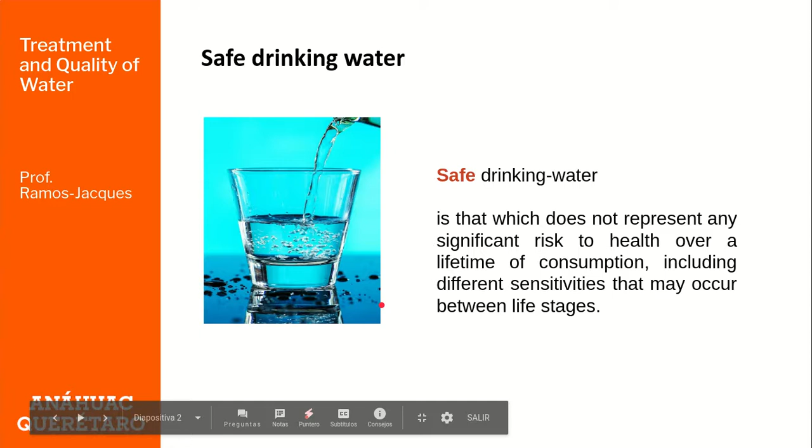How could we determine that water is safe to drink? We must know the quality of water. Water quality is measured by specific characteristics: physical, chemical, microbiological, and radiological.

Drinking water must be free from taste, odor, and color. This is a physical perception and it is subjective, but we won't drink water that doesn't have these characteristics. The real safe drinking water comes from three characteristics: chemical, microbiological, and radiological.

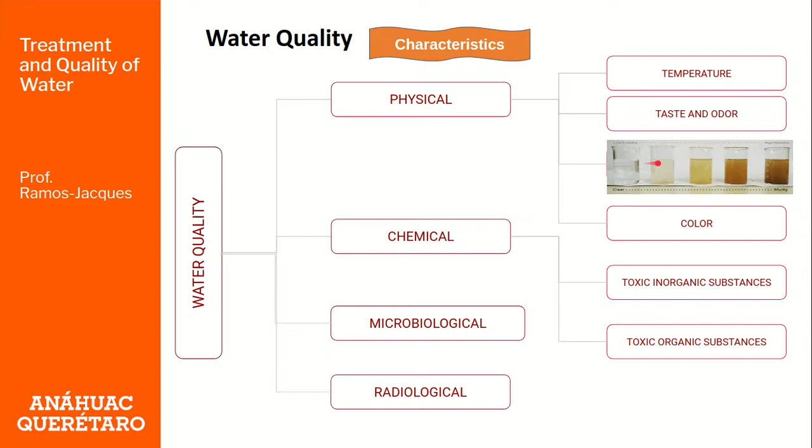For example, physical characteristics could be the turbidity and color of water. Turbidity is also known as opacity and visually indicates the quantity of suspended solids. You can see here clear to murky samples of water. Which of these samples would you drink?

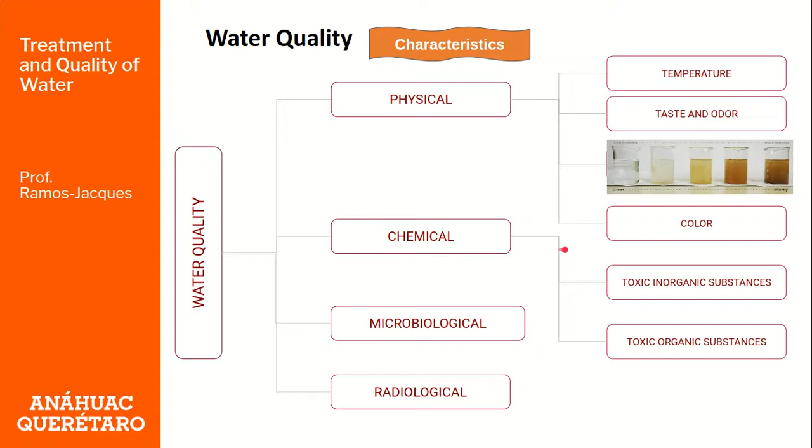In wastewater, color indicates wastewater age, like gray or black in anaerobic conditions. You can see here this black water, wastewater, is contaminated.

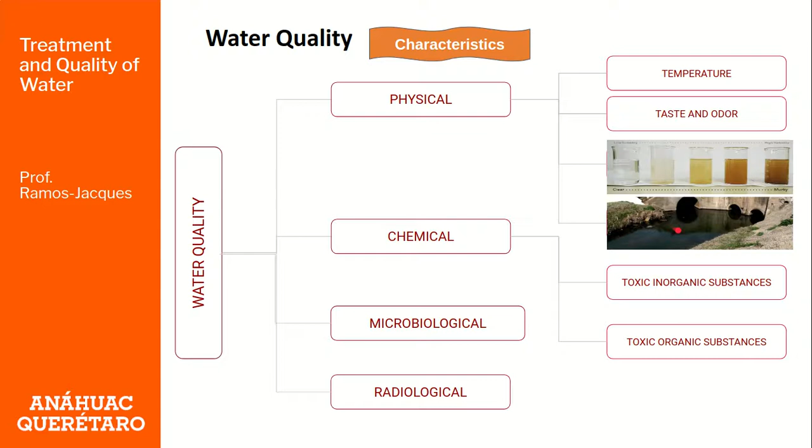Some examples of other characteristics, like chemical characteristics of water quality, are toxic inorganic substances. These toxic inorganic substances could be some metals, mineral-based compounds such as nitrates and asbestos. This could occur naturally in water, but also could be because of human activity, and could include antimony, arsenic, barium, cadmium, copper, lead, and these come from some industries, discharged directly to the water bodies.

Toxic organic substances could be carbon-based chemicals such as solvents and pesticides, which can get into water through runoff from the discharge of factories such as this.

Radiological characteristics could be measured by different equipment, but in general the measurements are located within these three characteristics.

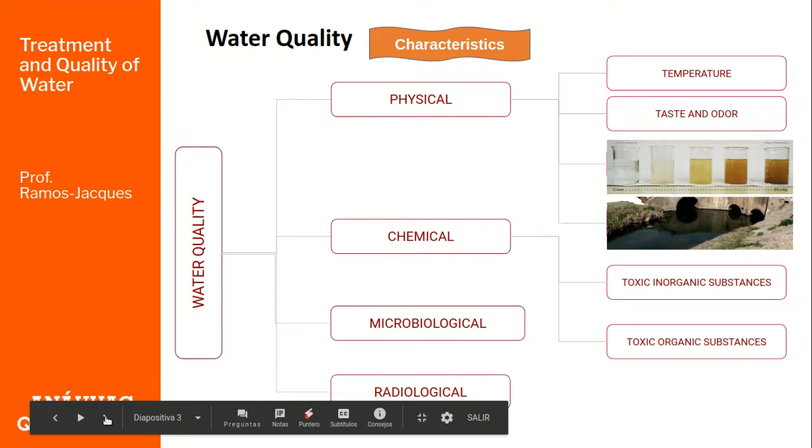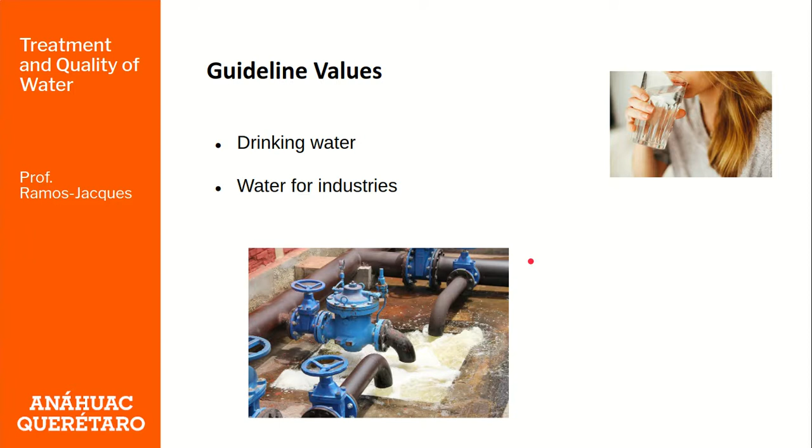After we measure those levels or characteristics in water, we obtain two types of guideline values depending on the use: could be for drinking water or water for industries. Then these guideline values we can use for specific characteristics in water.

For industries, we have three types of water. The first is inflow water that might come from town water, underground bore water, or rivers. It comes from different sources, but it must meet quality specifications because it's the water that flows into an industrial plant for use.

The second type of water in an industry is wastewater, that is usually highly contaminated and contains high levels of dissolved or suspended matter. This is the water that has been used by industries through industrial processes. So we have to treat it.

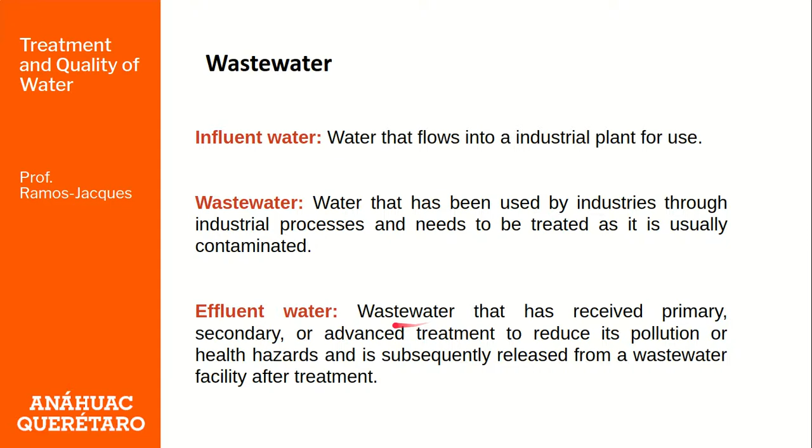If we treat this water, then we have the effluent water, which is the water that has received primary, secondary, or advanced treatment to reduce its pollution. So this effluent water goes directly to the natural water body.

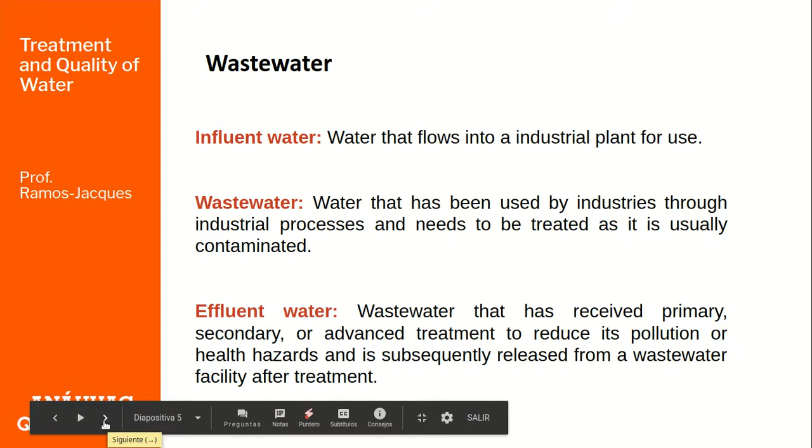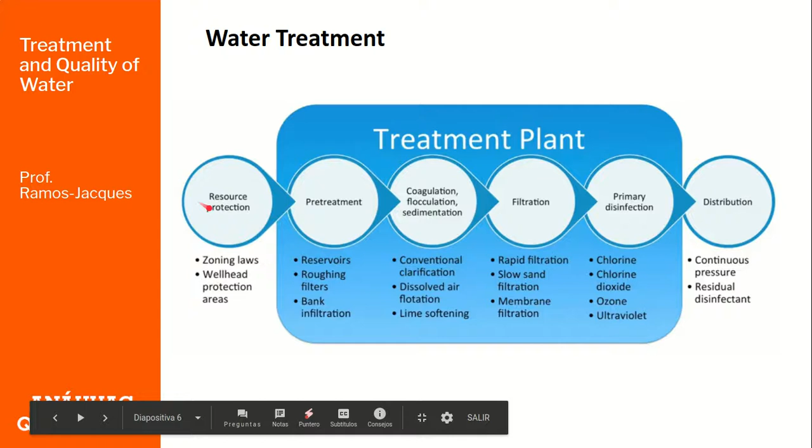So this is an example of a treatment plant. We have here the steps of the treatment train, and in this example it is for distribution of safe drinking water. So we have the resource, and we have to protect that resource.

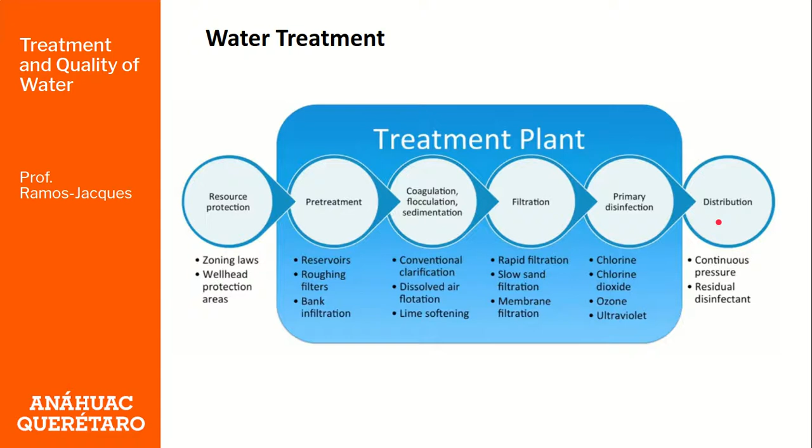Then we have the first treatment, which is a primary treatment or pre-treatment. We have the solids retained and removed, and then primary treatment including sedimentation, and filtration which could be rapid, slow, through sand and membrane, and primary disinfection, which is mainly by chlorine, and then the water is distributed. This is a typical treatment plant for the distribution of water to our homes.

If we want to treat the water, we have to know which pollutants are in it, and for each pollutant we have a treatment. Here we have some of the most common pollutants. Suspended solids could be treated by sedimentation, letting the solids settle, and by coagulation and flocculation.

Another important pollutant to treat is dissolved organic matter, which is treated in advanced treatment after the secondary treatment, in biological treatments or adsorption.

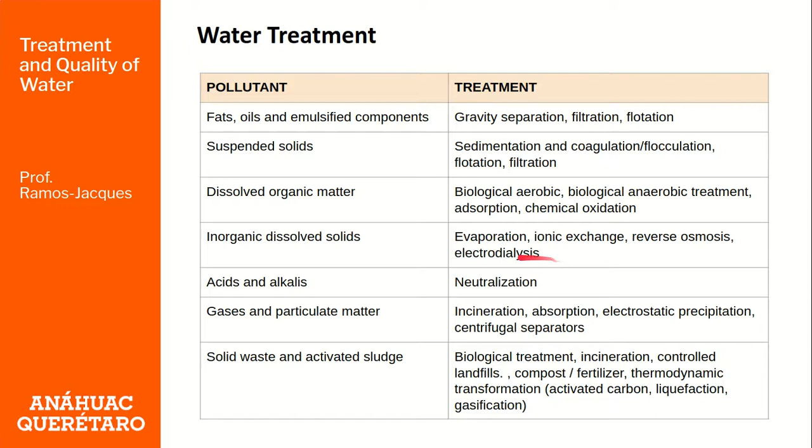Then the inorganic dissolved solids that we already mentioned, these are commonly heavy metals, and also acids and alkalis, and solid waste.

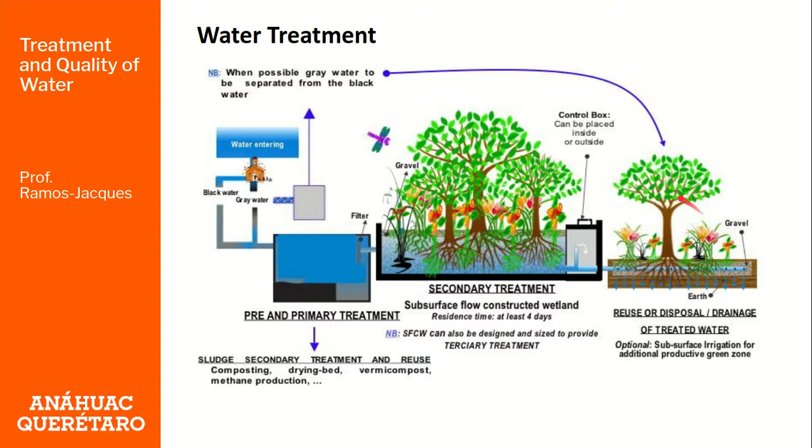This is another example for a treatment plant. Here we have the water entering, and then there's an output of domestic use, and then we have black water or gray water, which is contaminated. Then we have a mixture tank where we have the pre and primary treatment, and then we filter that.

How could we know the efficiency of treatment systems? We have here two examples. Sedimentation, which we said was primary treatment, has a time of residence, the time that the water flow is going to be in this process, of 2 to 4 hours.

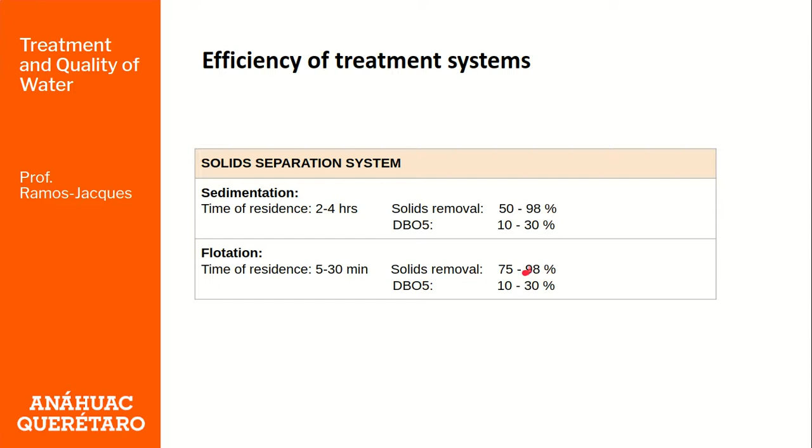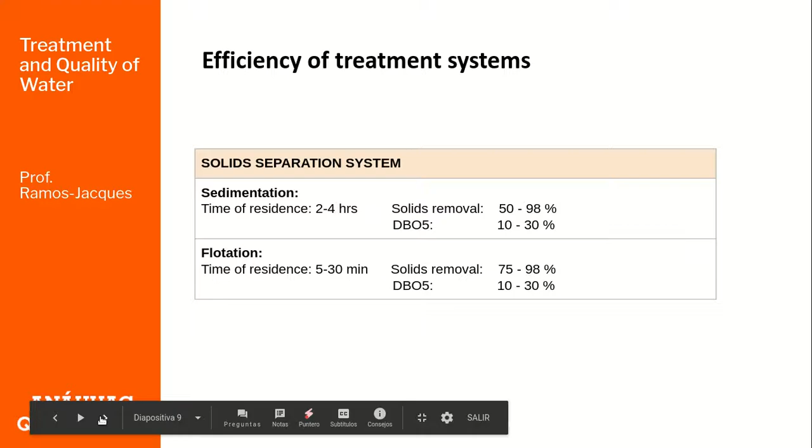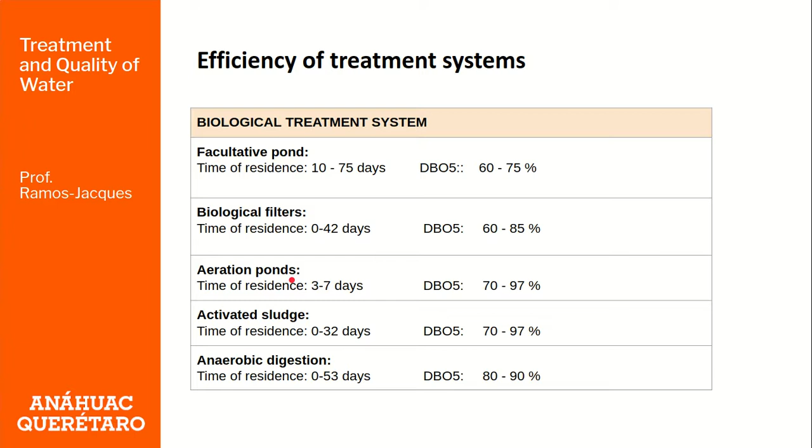And that's for solids separation systems. But we also have biological treatment systems like facultative ponds, biological filters, aeration ponds, activated sludge, and anaerobic digestion. If you look at the efficiency of those systems, activated sludge and aeration ponds are the most efficient in biological treatments.

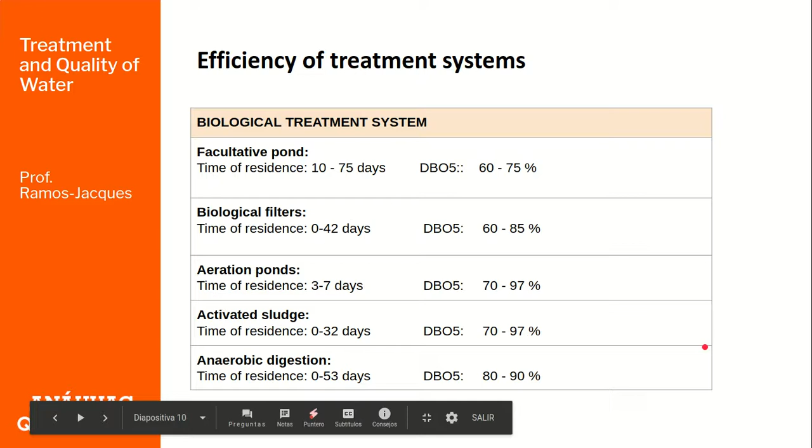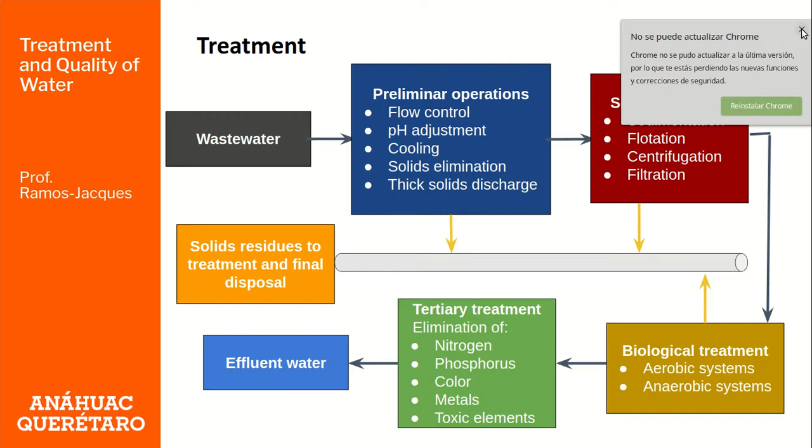This is another example. In this case we have wastewater, not safe drinking water, so we have to do more processes or operations in the treatment train. Wastewater enters, and then we have preliminary operations: we control the flow, adjust the pH, and cool the water to avoid problems in further equipment.

We have solids discharge, and then the water flows over, and this is the solid separation. We have primary treatment with sedimentation, flotation, and filtration. Then we have another solid discharge, and then the water flows over, and we have biological treatment, followed by another discharge of solids.

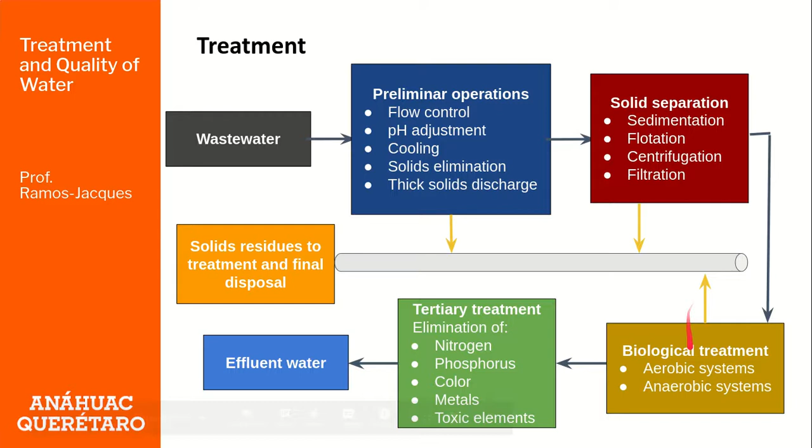In biological treatments we could have aerobic or anaerobic systems, and then the water flows and we have the advanced treatment. Here we eliminate nitrogen and other metals that are difficult to eliminate, and then we have the effluent water. This water is going to be returned to nature, so it has to be well treated.

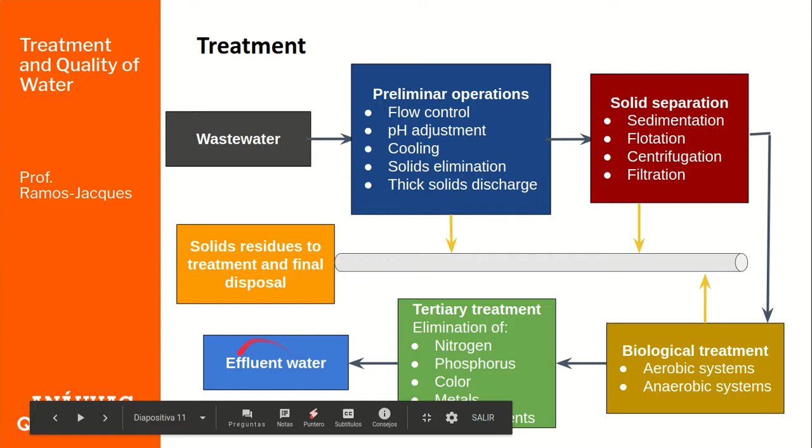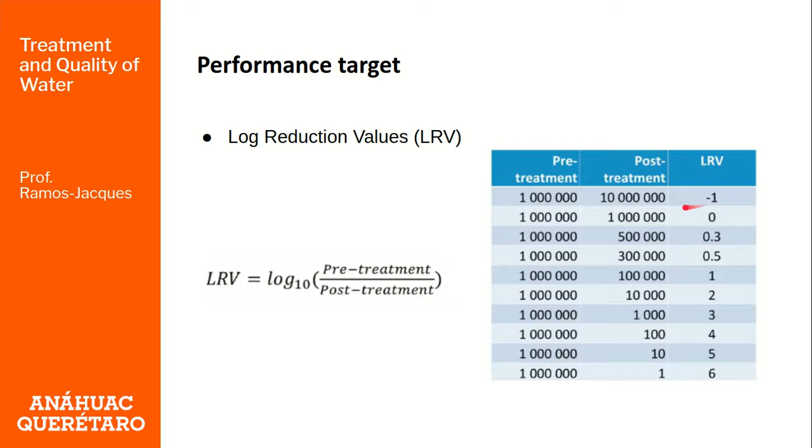So if the concentration is unchanged by treatment, then we have a log reduction value of 0. It's also possible that the concentration of the contaminant increases, then we have a negative value. But if the contaminant is reduced, which is what we want, we have positive values, indicating that the contaminant is being reduced from the flow of water.

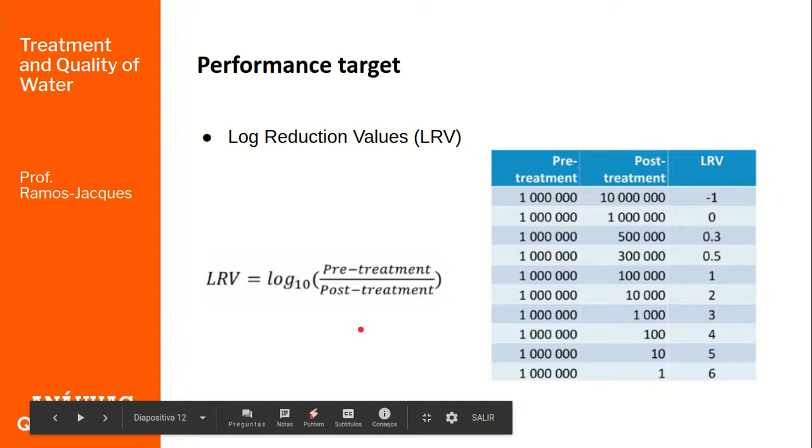So we studied the basic concepts of treatment and quality of water, and we also studied the performance targets that can specify the amount of log reduction values that should be achieved for certain kinds of pathogens. System assessment, operational monitoring and management, and communication should all be part of the verification for any water quality system. You have to manage all those resources to obtain a specific water quality for a specific use. That's all.